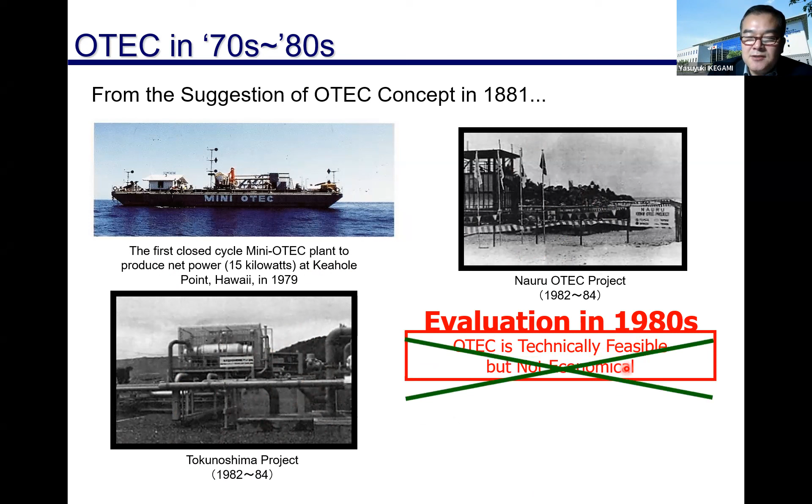As you know well, after the oil crisis, many OTEC projects started in Hawaii, Nauru and Tokunoshima in Japan. The evaluation in the 1980s was that OTEC is technically feasible, but not economical. But recently this evaluation has dramatically changed. Why? It's in the spotlight again due to technical improvement and changes in the social situation.

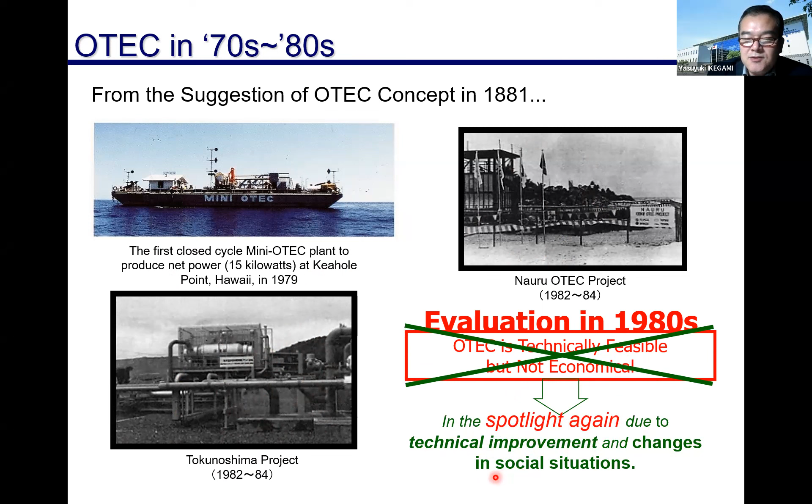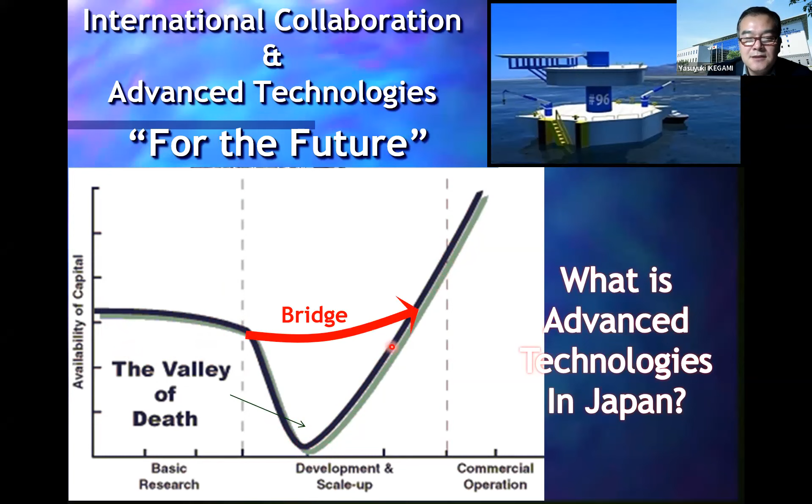Until now, the OTEC technology is a success, but it has not reached commercialization. But we developed new technology through our collaboration. So I think OTEC is in this position, waiting for the next step, commercialization. We already have the technology and the group. We want to accelerate this next stage, and I believe that from this meeting we move to commercialization.

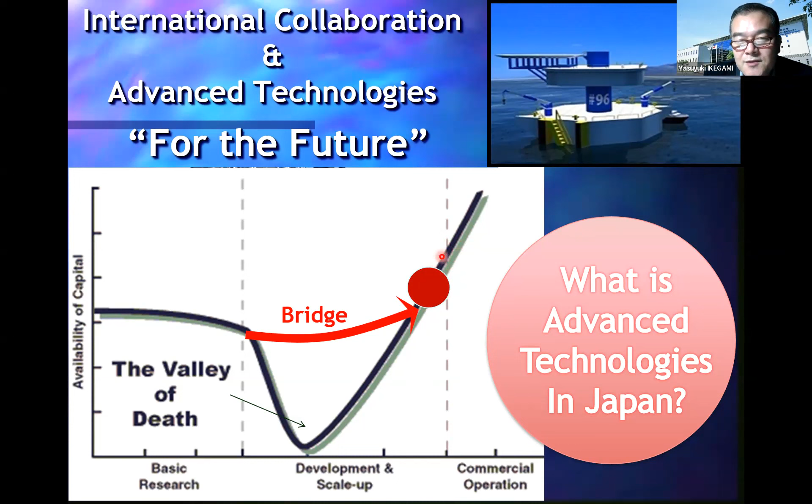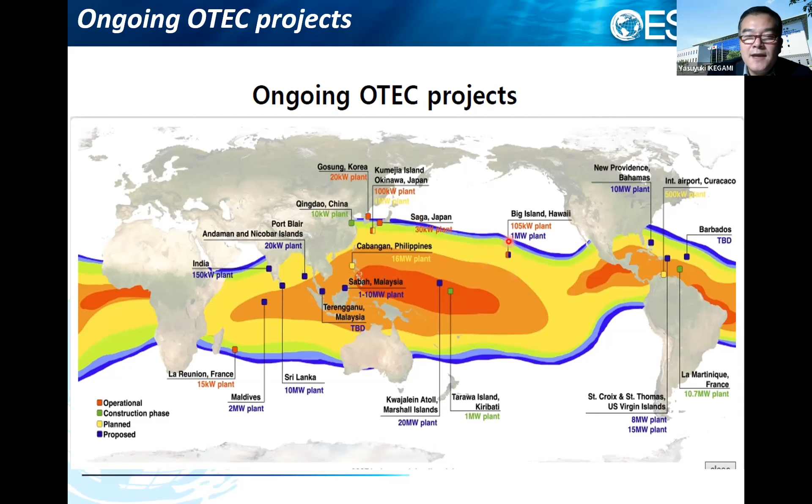Recently, as you know, there are many OTEC projects in the world. This map is from the IEA OES, the International Energy Agency Ocean Energy Systems, led by Dr. Kim. Ten years ago, only Japan and Hawaii, but recently many small island areas are promoting it. In Japan, the OTEC plant is a demonstration success, a world first. The 100 kilowatt plant is already connected to the Okinawa Electric Power Company, with post-OTEC deep sea water use, over 5 years of continuous operation using actual sea water.

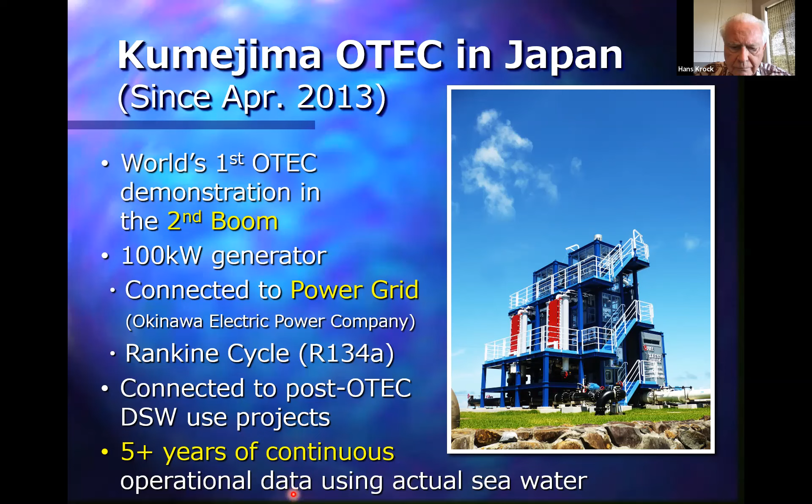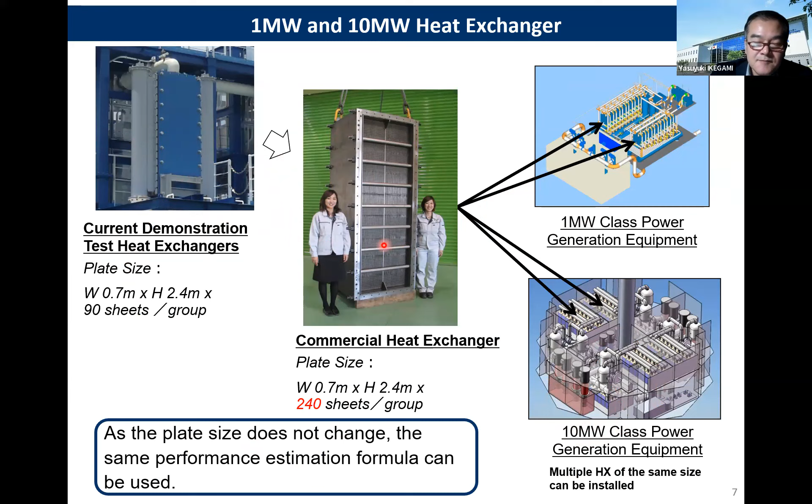These technologies use advanced heat exchangers and a new cycle system. We already designed 1 megawatt and 10 megawatt OTEC plants, and the plate size is already ready for commercialization. As the next step, we are planning a 1 megawatt OTEC. In Japan now, the government is promoting a 10 times larger deep sea water intake tube. We started last year, and by the end of this fiscal year we complete the pre-feasibility study. After the 10 times deep sea water intake, we are planning the 1 megawatt OTEC and deep sea water applications, with Japanese companies now promoting the 1 megawatt.

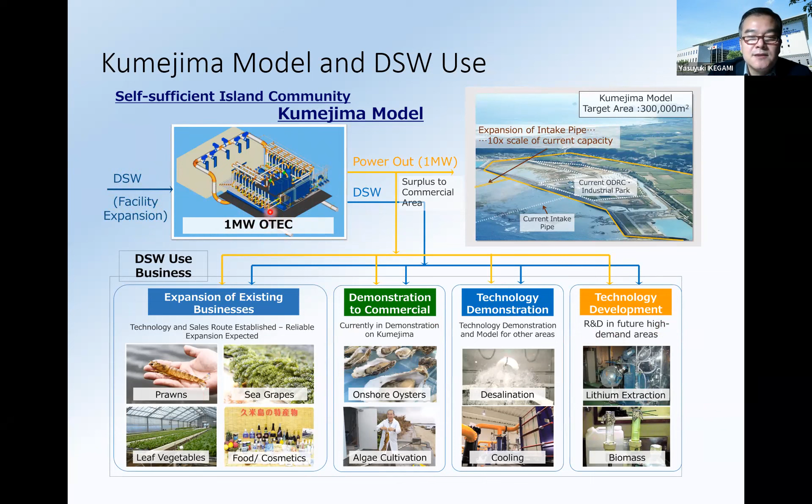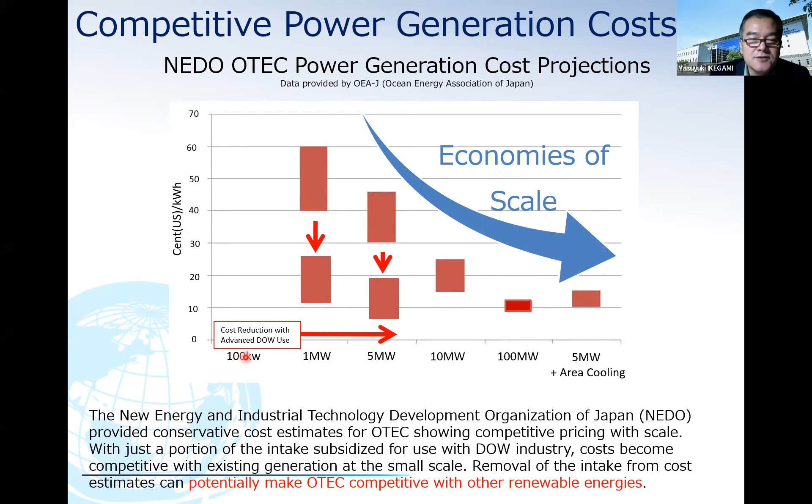OTEC has scale merit. Small OTEC is not economical, but large OTEC is very economical. This is one characteristic. And this is the cost estimate for OTEC only. But if we combine deep sea water applications, we can reduce the electricity cost with advanced deep sea water use.

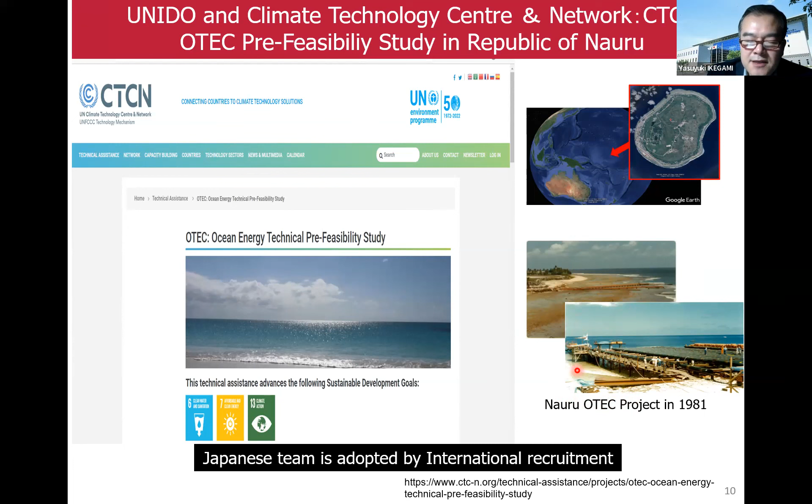Now we introduce the international collaboration projects. Recently, the UN and UNIDO are promoting OTEC projects. CTCN opened a tender for an OTEC pre-feasibility study in Nauru, and the Japan team was adopted. Nauru is a very small island, like Kumejima Island. 40 years ago, Nauru challenged OTEC, and now Nauru re-challenges OTEC. With only solar power, 100% renewable energy is difficult, so the Nauru government re-challenged OTEC, supported by the UN.

The Nauru project already finished the pre-feasibility study. The next step is the GCF, the Green Climate Fund, a very huge fund. Now we are preparing a medium project, 50 million to 250 million US dollars, for the Nauru OTEC project. The Nauru OTEC project is not only electricity, but also fresh water, food and deep sea water applications.

Another international project: MOL, Mitsui O.S.K. Lines, just started a Mauritius 1 megawatt OTEC project pre-feasibility study within 1 year. After completing the pre-feasibility study, the next step is implementation of the 1 megawatt OTEC, the desalination system and deep sea water use.

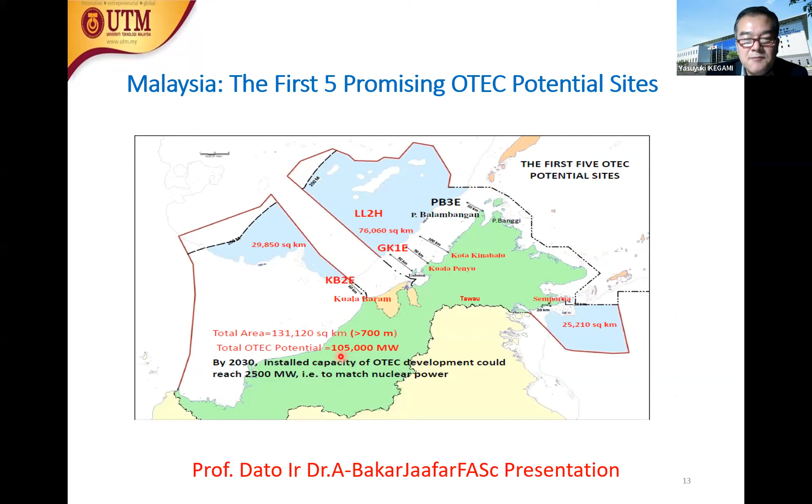Additionally, Malaysia has a very huge OTEC potential. 3 years ago, the Japanese government started a Malaysia project. Now we are promoting a new hybrid OTEC system, producing electricity and desalinated water. Desalination has already been realized in India, and OTEC already realized in Kumejima. As one system, we want to realize the H-OTEC system. The H-OTEC system is already completed in Japan, and within this fiscal year we move to Malaysia, constructing a Malaysia model like the Kumejima model, not only electricity.

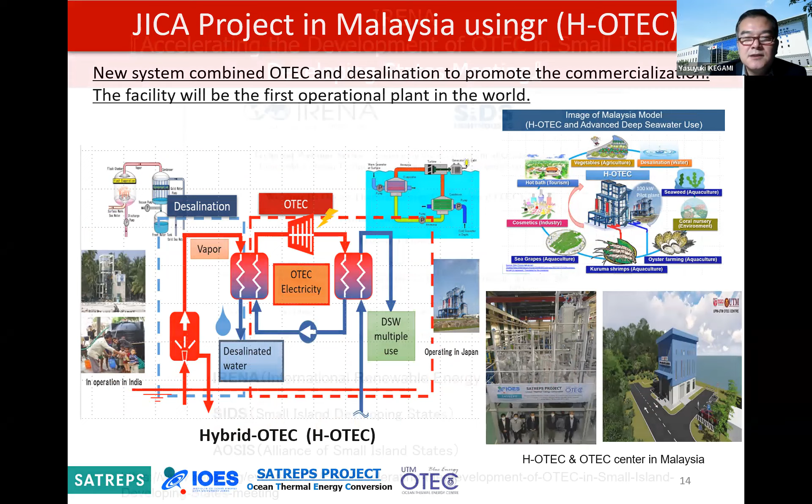Additionally, IRENA this year holds a meeting on accelerating development of OTEC in small island developing states. Small islands in the world are now strongly promoting OTEC. I'm introducing OTEC in the keynote lecture. Palau, the Bahamas, Mauritius, many small islands are very interested.

So as I introduced, now is the OTEC moment, so it's a very big chance to move to commercialization with international collaboration as Blue Innovation. Why not commercialize as a global leader in Hawaii? I've requested the Hawaii next movement.

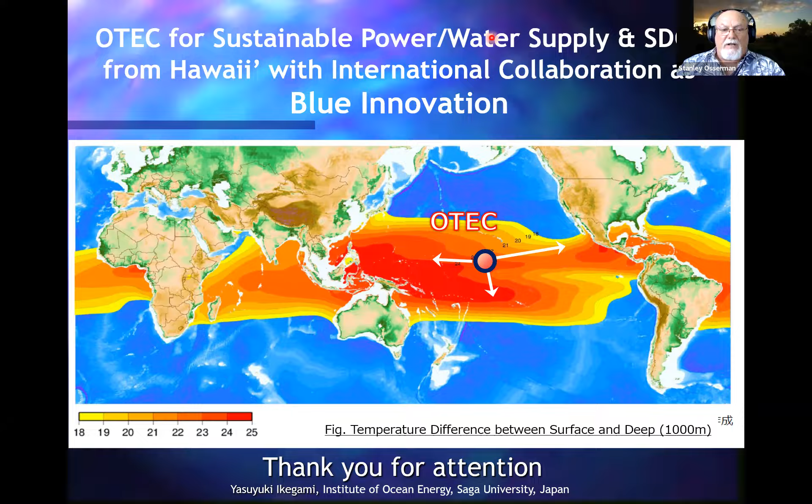Next, if Dr. Kim is ready, we'll put Dr. Kim up, and like I mentioned, I'd like to kind of hold Ben to the end, and we'll listen to Dr. Kim right now. So you may have to stop sharing your screen. There you go. Hey, Stan, I'm not sure that Kim is online though. Okay. I've been trying to contact him, but I haven't been able to. Okay. Well, in that case, Ben Martin, are you up to putting your slides up, and we'll put you in now then? Sure, I can go now. Okay. He has a real good presentation too. Well.

So hello everyone, my name is Benjamin Martin with Xenesys Inc., and we live in Okinawa. So the screen you see behind me, it's our mini Diamond Head. This is one of our beaches here on Kumejima, which is offshore of the Okinawa mainland. So I'll talk a little bit about what we're doing here on Kumejima, which is a small island about the population of Molokai, but much smaller as far as land area.

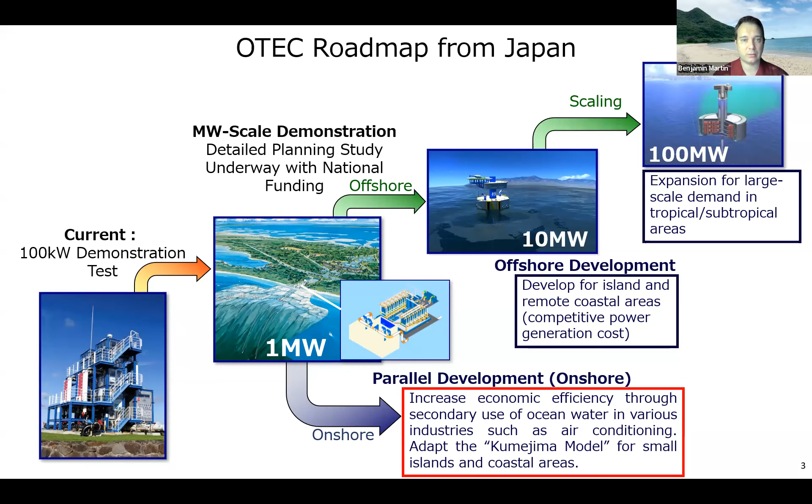So we see kind of two markets in the future, where offshore OTEC can help supply large islands and grids, and onshore OTEC can also support economies and island development and kind of the circular economy that people are looking for right now.

OTEC has the benefit of deep sea water, which is a local resource that provides energy security, water security, energy savings, food and economic security, and environmental security. It's hitting all of the issues that people are finding right now with the war going on, with the pandemic, and with the anti-globalization, from all the challenges we're facing in the world right now. So this is something that can enable islands to meet their local needs, but also have opportunities to trade and connect with their regional allies.

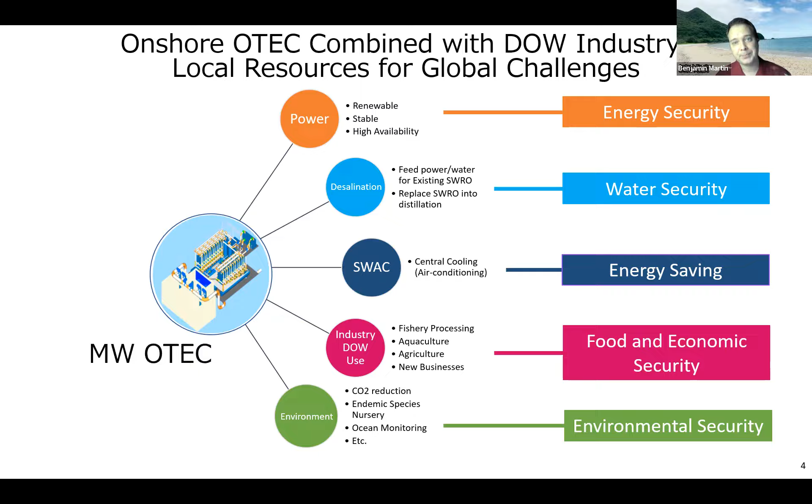So it's a challenge for us to increase more renewable energy. One thing we do have is deep sea water. Because we have a pipe that was installed in 2000, we can bring up 13,000 tons per day. That's about 1/10 of the size of the water available at NELHA.

But we use this water in a variety of ways, mostly for aquaculture. So we can produce prawns, we can produce sea plants, we can produce salt water and cosmetics. So these have become a very important use for us here on Kumejima. Around Japan, actually, there are 15 sites throughout Japan where you have access to deep sea water.

And so there's a whole variety of industries and uses that have grown up over the past 20, 30 years from Hawaii's initial demonstration. And so there's uses for the nutrients, there's uses for the cleanliness of deep sea waters, and there's use for the cold. And these can be used for everything from mineral extraction through power generation, which is something we're doing here on Kumejima.

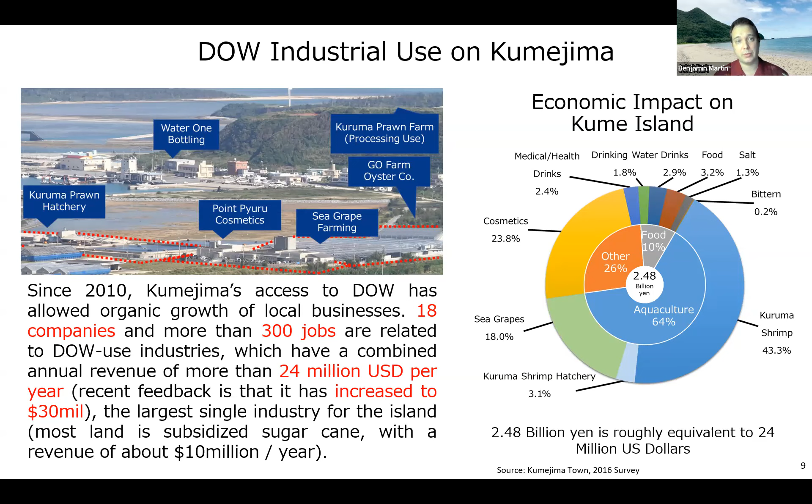So for us, it's a critical part of the local economy, but it's also something where there's potential for growth if we have more resources, which means new water. And so our perspective is we need more clean energy, we need more water. So we are working to integrate OTEC and these different industries right now at a small scale so that we can use the water multiple times and increase our benefits from the existing resource.

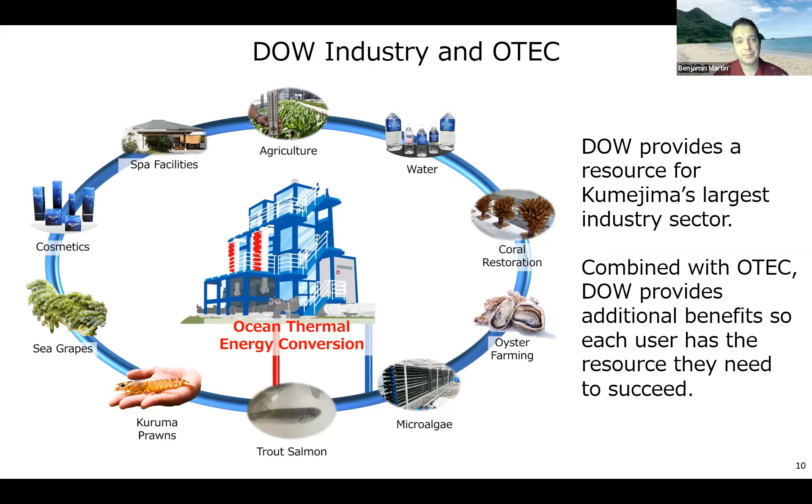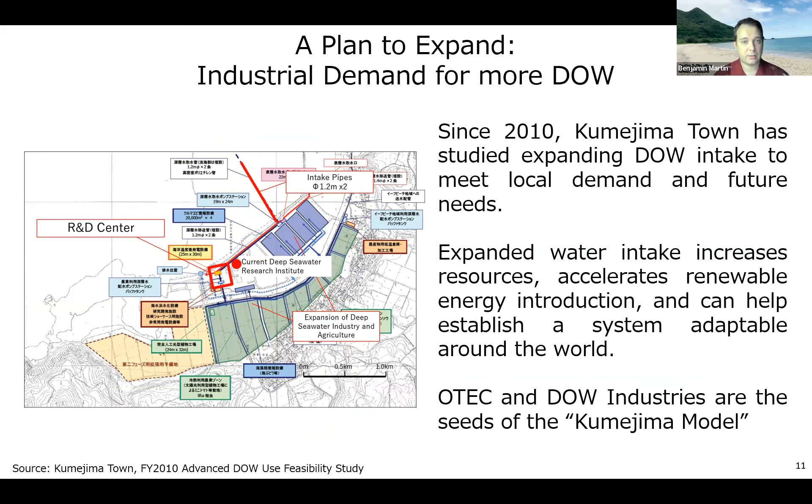However, there is demand to expand in more available areas. So since 2010, Kumejima has implemented studies towards expanding the intake, getting more water and increasing what we can do with the same amount of water we have. And then with that, also looking at our responsibilities towards the global environment and going green and creating renewable energy.

So Kumejima Town announced that they want to be 100% renewable energy back in 2008, and then 2018, and then in 2020 they did an energy vision, a policy looking at how do we get there. And so for their view, they want to do 1 megawatt onshore OTEC as a first step to get us about 20% of the renewable energy we need, and then a further 5 megawatts to get us to about 100% with renewable energy such as solar, storage and maybe EVs.

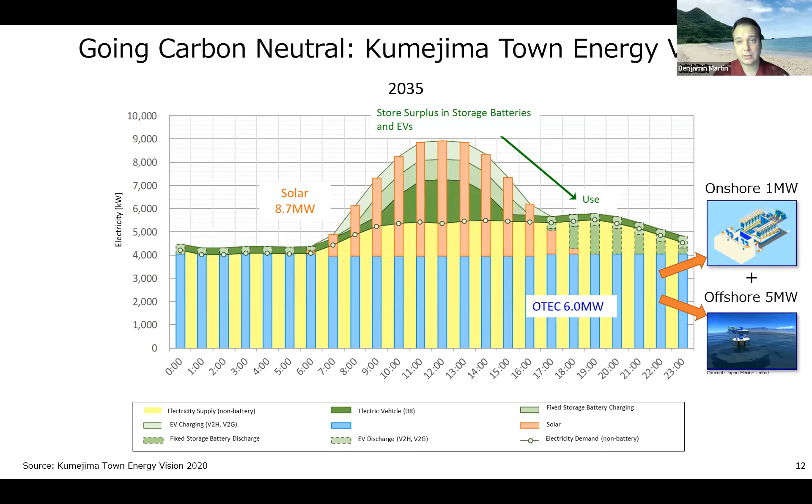And so that's their goal, is by about 2035 we can go 100% renewable energy through OTEC and solar and related technologies. And that's what we're working towards now on Kumejima. As Professor Ikegami showed, this is our estimate for OTEC growth and how the economies of scale will work on it. But we really see connecting the different industries we have right now can dramatically reduce the cost of onshore OTEC. So our perspective is using deep sea water as its own resource, its own industry.

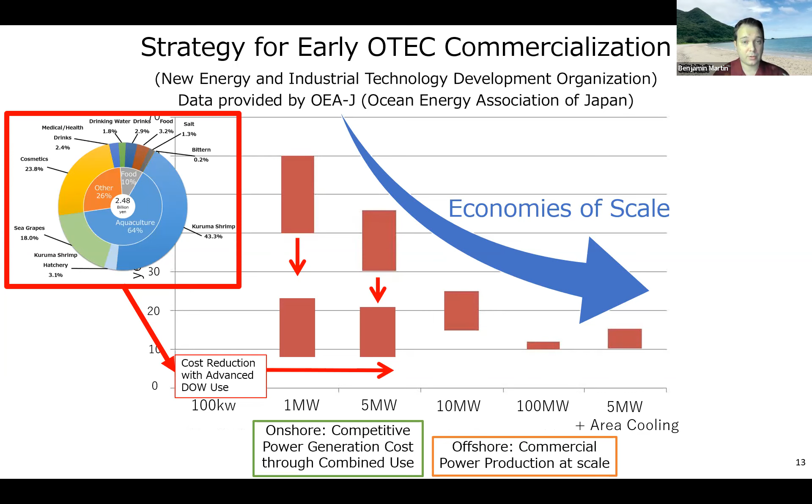Think about OTEC just on its own. If OTEC can use the water, produce power, it becomes a power generation business off on its own. And so that can be a really attractive power generation cost, even at the small scale, which is really a paradigm shift for small island countries where they're importing oil, they're importing diesel fuel, where now they can just create it all on their own and that money stays locally.

So for Hawaii, as many of you know, NELHA provides a great resource for Hawaii in terms of research and development, and they've really grown their aquaculture, and the amount of economic impact from NELHA is quite large for Hawaii as well. There was research done that shows that more than $100 million of revenue is added to Hawaii's economy from NELHA. And so while onshore OTEC is a little bit of a challenge there because of the different rules and things that are existing, there's a great opportunity likely for offshore OTEC in Hawaii.

And even at the 10 megawatt, the first offshore type scale that might be put in, we're looking at power generation cost of about 20 cents per kilowatt hour, which, while expensive, with Oahu right now with power generation costs of 32 cents or more, and I think we're looking at even higher costs more recently, it's attractive even at this early stage. But it also opens the opportunity for all these other uses, such as food production, agriculture, and all the things that are going on at NELHA, but also increasing scale or diversifying.

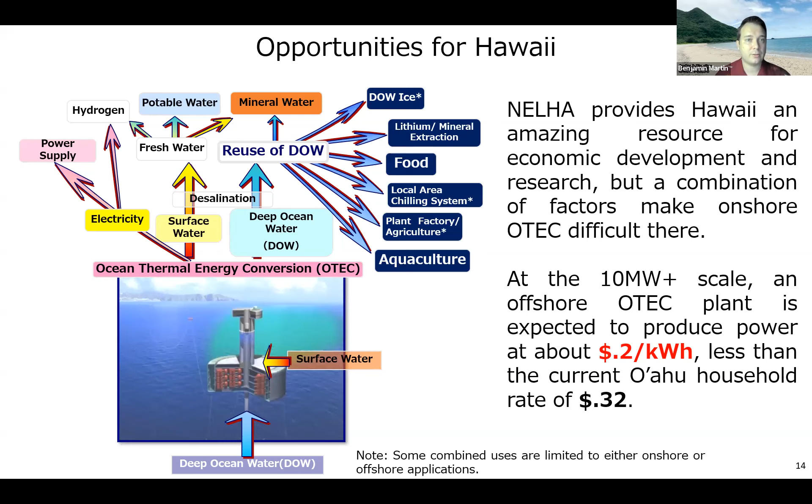So, connecting to around the world, OTEC from Hawaii's initial use in the 1980s, it's grown. And I think more than most of you realize is that there are now at least 38 sites with about 45 pipes around the world, including Korea, Taiwan, India, Japan, and NELHA, and also French Polynesia with new pipes that were just put in last year in French Polynesia to cool a hospital in an economically friendly, environmentally friendly way. So this is something that's growing and becoming ever more necessary, but we also need to more quickly bring forward the OTEC technologies that can help enable these and also expand our renewable energy portfolio.

So this is just a really quick introduction to what we're doing here on Kumejima and what we see going forward. But I'd be happy to answer questions, and I have a few more slides that I can bring up for those specific questions later.

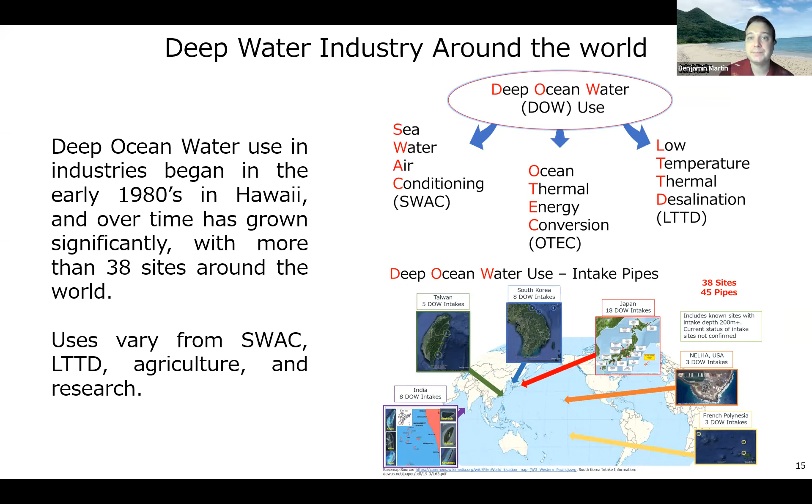So yeah, Ben, thank you very much for the presentation. I had a question from the chat, and it kind of leads me to the scalability piece here. The question was, at what point can we start producing hydrogen through electrolysis using OTEC? And I think they go hand in hand with the scalability issue. These projects require a large upfront investment, but it is a good investment because once you get it to scale, your return on investment is actually really good. But it's hard a lot of times to get initial investments because it is a large investment. Could you expand on that a little bit? And also, could you give us a really short version of the Rankine cycle, how does a water temperature give you electricity?

Sure. So for the electrolysis one, there hasn't been a major advancement in electrolysis technology that I'm aware of. So unless there's a major breakthrough in that, it'll be hard to bring down the cost, aside from going to scale or reducing the electricity cost and the water cost. So one way we can do that is scaling up, creating cheap OTEC power. Saga University has a flash desalination demonstration satellite here on Kumejima, and they do have a small scale hydrogen demonstrator. So the idea behind that is using post-OTEC water for cheap, low maintenance, clean water.

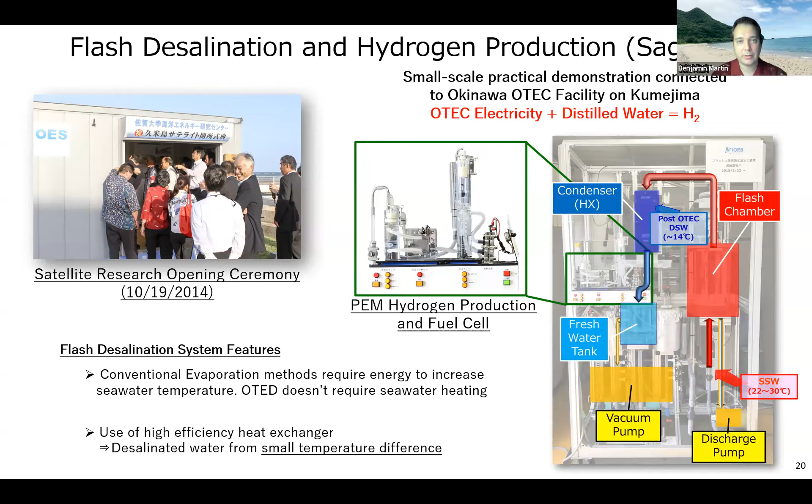And so that distilled water can then be used more easily because it is distilled. It wouldn't be as easy to drink, you'd have to add minerals back in, but it can go straight into a fuel cell and electrolyzer. But the general technology in electrolyzers hasn't really changed. So that's expensive and it requires electricity. But if the electricity is cheaper and the water is cheaper, that can be one thing that can bring this forward more quickly.

While you're pulling that slide up, working with hydrogen, the biggest cost is the electricity. So if you can get your electric costs down, like you say, to between 2 and 10 cents a kilowatt hour, now all of a sudden hydrogen becomes a very economical option. Sorry, what was the second question? Well, on the Rankine cycle, the actual process of producing electricity with OTEC.

I had a slide in my deck and I took it out. Let me grab one. Okay. I think some people are probably familiar with it, but I don't know that everybody is, and it'd be good to get a quick primer. Otherwise, we have to go to Dr. Krock and he'll give us the long version because he's a professor. He can't give a short version. He's going to give us all the long experts version. With the experts here today, I expected them to share, so I took my slide out.

But with OTEC, we're working with closed cycle OTEC. Dr. Vega will probably talk about open cycle, which has a very large diameter turbine because the pressure is low, so it can create very large scale facilities, especially onshore. In Japan we focus on small scale closed cycle because it's more compact. And so what we do is we have a low boiling point working fluid. Water boils at 100 degrees Celsius, and the surface seawater is only about 30 degrees Celsius. Sorry for those in the United States, I've forgotten how to switch to Fahrenheit.

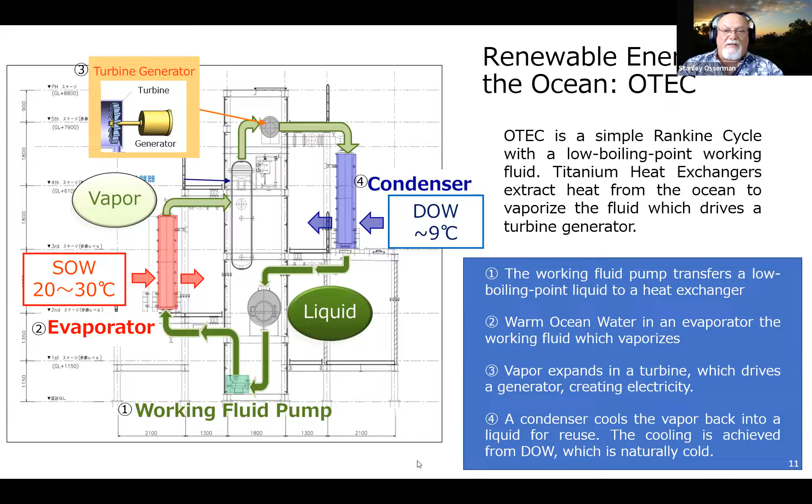And just to clarify then, when you're using the system, you're generating AC electricity with that spinning generator, correct? It depends on the power conditioners we connect, but you can do pretty much anything you need. But yeah, it's creating the AC, as opposed to solar panels and wind turbines. Well, solar panels specifically, they give you DC power. This gives you the option, right? You can do both. Terrific. Can use the DC for the electrolyzer and AC for putting it on the grid.

Were we able to get Dr. Kim up? I don't think so, but I do have his PDF version of his slides, and I could show them because at least the last few ones are really interesting. Okay. You want me to do that? Yes, Dr. Vega, can you combine yours and his, do both presentations? No, but let me first just try to find his. Wait. Okay. Oh no, his PDF. Oh, where are you? We'll look through the chat for any other questions. Okay. Oops.

Oh, there was a comment about my comment about the equator. You generally find a little bit more stable weather conditions right along the equator. So you get less high energy weather phenomena. Usually you have to have a big temperature differential to get that kind of weather, like typhoons and cyclones and hurricanes. You generally have more in the doldrums. You have less, I'd say, radical. You may have more rain, but you usually have less radical and powerful storms to damage your system. So if you have ocean-based OTEC, then you can have a more stable platform, and it lasts a lot longer.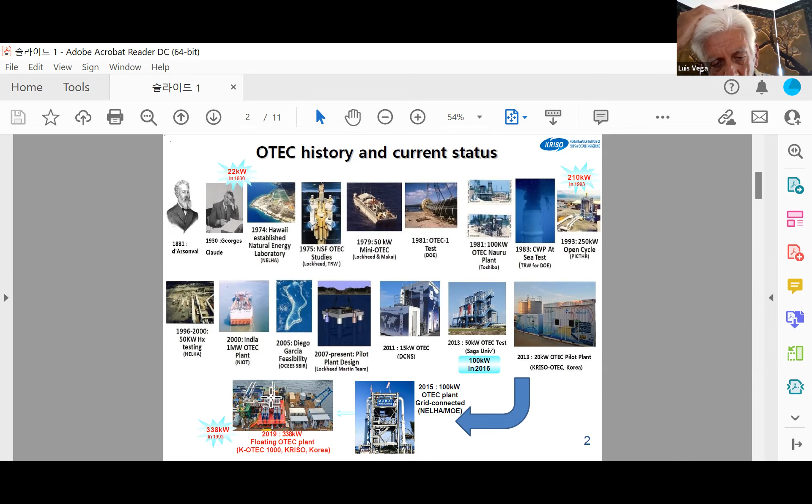But then, since the pandemic, unfortunately, because his budget was sitting in the bank for 2 years, the government took it back for other purposes, and now he's trying to get his money back to be able to deploy this plant in Kiribati. And then he likes to show this diagram that you've seen before, and I'm actually going to talk about it in detail during the next presentation.

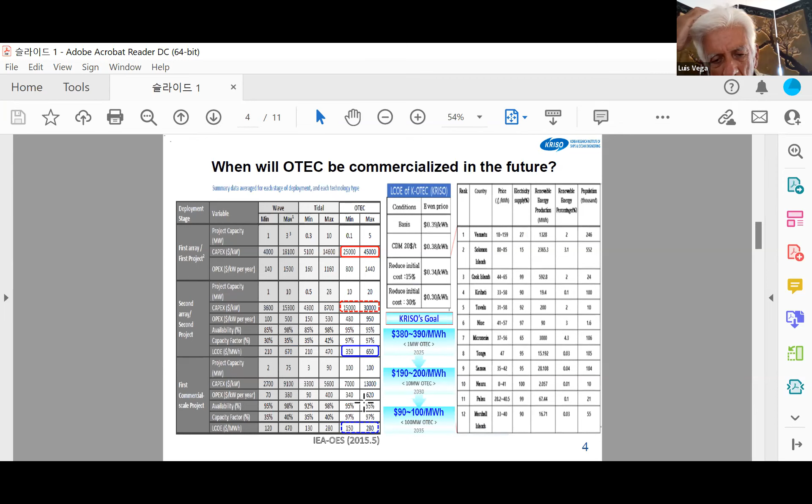And then here he shows a lot of data. It's hard to go through, but showing the different prices for the different systems, comparing wave to tidal to OTEC. And of course, OTEC comes ahead because it's 24/7, which tidal and wave are not. And then he likes to show the economy of scale, but I will talk about that later, so let me skip that.

And here he talks about how he would like to proceed. And fortunately for South Korea, like in the case of Japan, they do have industry involved and really providing a lot of support and advice to these developers, with government funding. But that's what he's trying to look into.

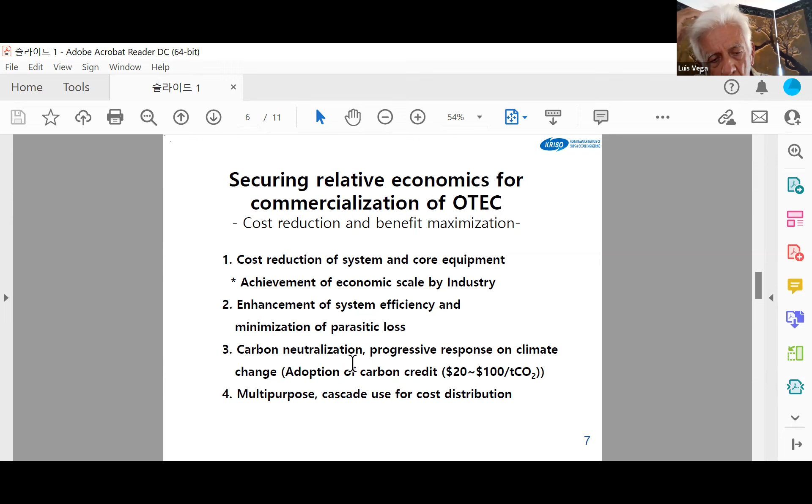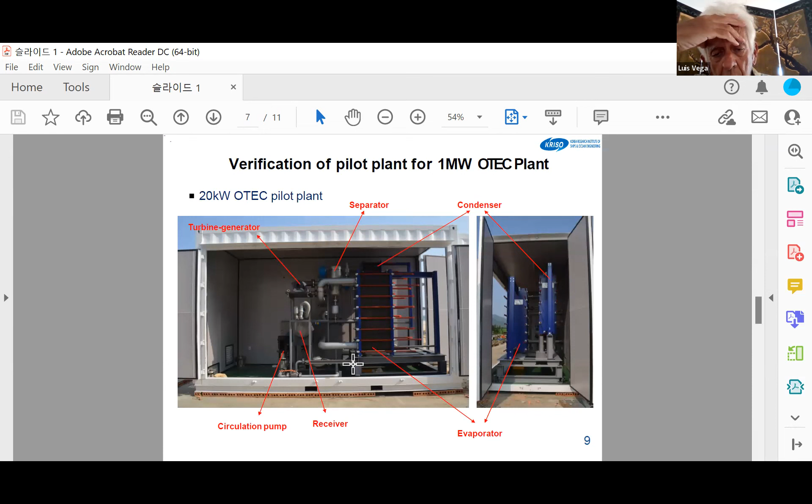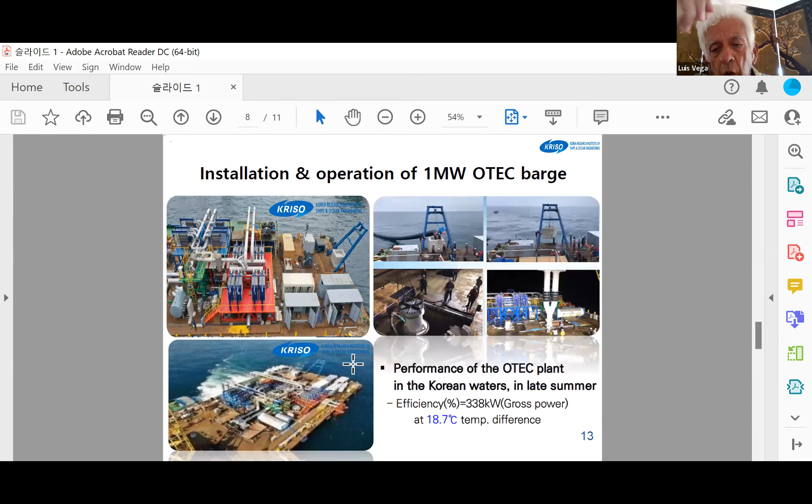And that just shows the small plant that he operated with his students, Dr. Kim in Korea. They did some wonderful experimentation and managed to select the right equipment for the next one, this 1 megawatt OTEC barge that they tested off the coastline there. Actually, I was there, and it was really successful. The beauty for them is that the bulk of the equipment is manufactured in South Korea. And this just shows the idea of how to move beyond these small plants for small islands.

And now the specific site in Kiribati and Tarawa. I hope that he gets his funding back from the government to install the 1 megawatt plant that will make a hell of a difference there. That's another idea they have, trying to move forward. And that was his presentation, although I did it in 5 seconds.

Do you want me to proceed now to what I would like to do? Let's talk a little bit about his presentation too, and this slide in particular. He told me that when he gets his funding back for Kiribati, it will actually be onshore versus floating, although it was designed for floating because he's going to be doing desalinization, and this slide shows the desalinization piece as well, correct? Yeah, but actually, just to correct that a little bit, it had to do with a budget gimmick, basically.

The plan was designed really to be land-based in Tarawa, but his government wanted to show that it works. So what he chose to do, smart man, he put the power block on a barge and used a vertical pipe, high-density polyethylene pipe that they once used at NELH, and he tested that off the coastline of South Korea. Then he took the barge back, and was going to tow the barge to Tarawa, beach it, and then install a pipeline that will go down to the right depth.

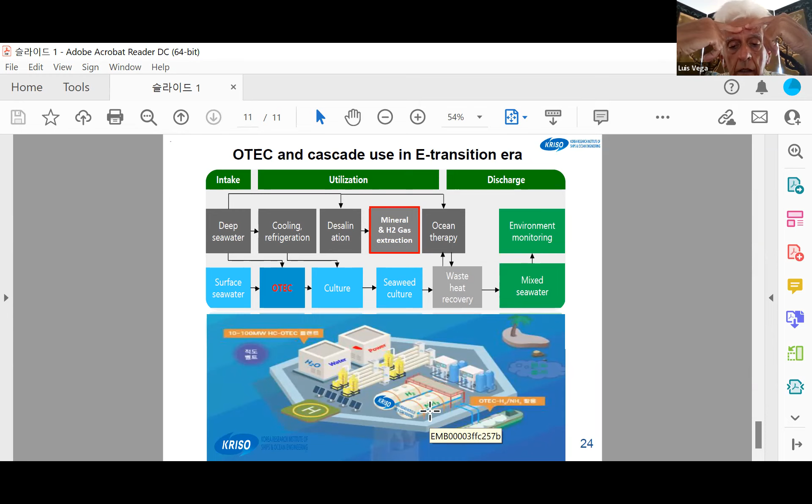Yeah, let me see if I do this right now. Can you actually see my screen? We still have Dr. Kim's view up now. Oh, sorry, you have to select your... your screen sharing is this. Let me just stop share and then start again, I guess. Yeah, that's the way to do it, huh? Now can you see it? It'll probably take a second or two to come up. You have it now? No. Did you select the image on your computer that you want to show? Yeah, I have it right now in front of me. And hit share again. Oh, but I have to go back to Zoom. Where are you, Zoom here? For some reason, I cannot go back to that. This is so embarrassing. Oh, share screen here. There you go. Too many windows.

But you cannot see my stuff, can you? It usually takes a couple seconds to come up, but we don't have it yet. How about now? Do you have it? No, this is embarrassing. I wanted to show his, but not mine. So if you select your screen, it should have what's on your desktop. You have to select your slides and then go to share again. Share screen, how about now? Oh, here we go. Okay, go ahead. There we go, it's coming now. Okay, you're up. Okay. You have the, oh, you have the first one. Right? We got it. Okay.

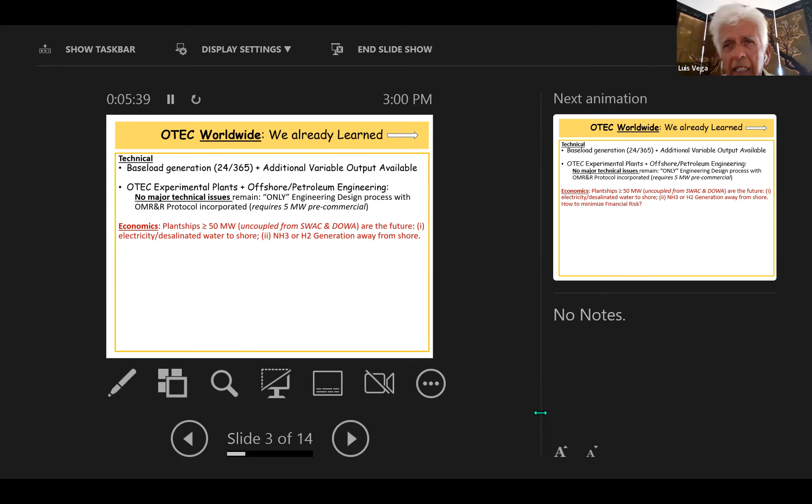So once more, the amount of water that I could use for a 2.5 megawatt OTEC plant - all of that water would be what I need to keep tourists in Waikiki happy. Then you see that it's uncoupled from the 100 megawatt plant with way too much water.

So when I think about future plant ships floating offshore, I really uncouple myself from seawater air conditioning and from deep ocean water aquaculture. Not to say that that's not valuable, but I'm looking into worldwide applications.

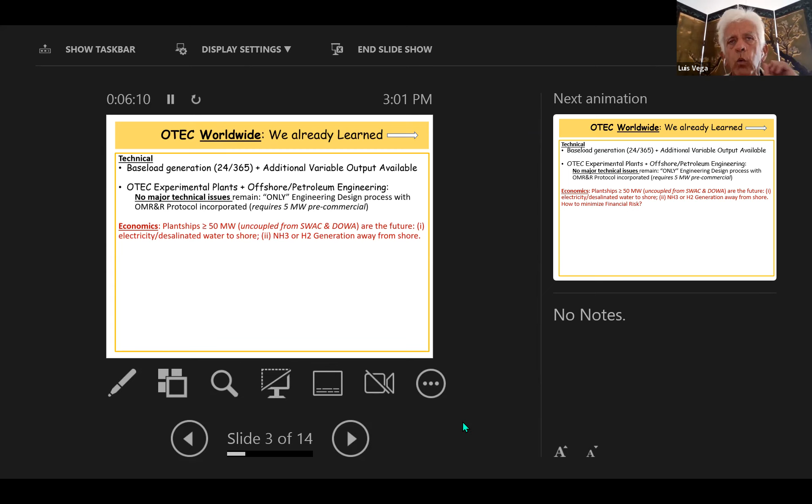And another question really is, how do you minimize the financial risks? Now, we don't have enough plants out there to be able to monitor what might happen, right?

But what we do have, thanks to Professor Nihous, and I'll talk about it in a second, we know theoretically how many plants we could install throughout the OTEC region. And we're talking about on the order of 5 terawatts of plants as a minimum that we could install.

And apparently, according to computer models, we wouldn't really be that detrimental to the environment, because we wouldn't change the distribution of temperatures in the ocean.

Now, just in case you're not an engineer, for the whole world, the primary energy we use is 18 terawatts. You know how much power, you know how much energy you have to multiply by the number of hours in the year. And in the case of OTEC, we're talking about 5 terawatts, for example.

But please keep in mind that primary energy includes the energy contained in a barrel of fuel, but as you know, only 30% of that is converted to electricity. So if the 18 terawatts includes fossil fuels, if you were to somehow make all the electricity without fossil fuel, we'd only be about 14, 15 terawatts, just to keep things in perspective.

Now, how about the political issue? I am convinced that we need government, angel, patient - and I call it pension - financing, because if you give me the funds to do this, me or whoever, there are many people qualified to do this, some are here right now on the screen, it would take me about 5 years to begin to produce electricity.

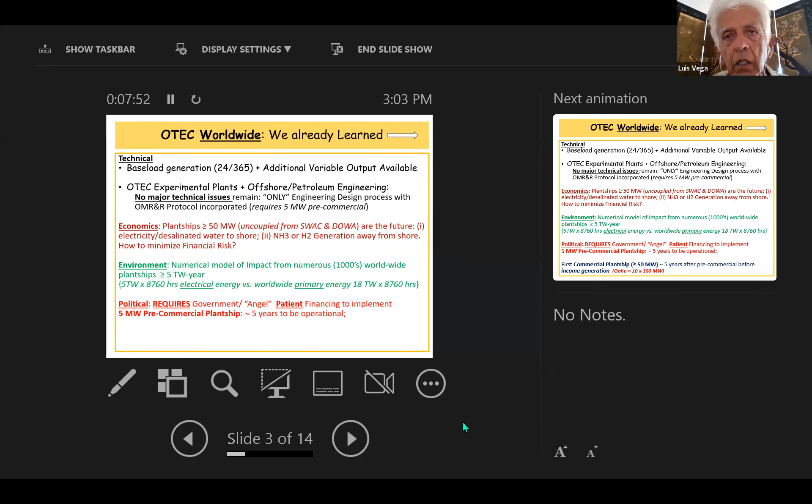And now I think that the first commercial plant ship that will be equal to 50 or higher megawatts will take 5 years to be operational after the pre-commercial plant. Just to keep things in perspective, Oahu is equivalent to 10 100-megawatt plants.

Now, this is one my dear colleague and friend for many years. Of course, he had to be French. Dr. Gerard Nihous, formerly from UH. We were kind of required by our Department of Energy to use this terminology. Theoretical resource refers to what is the source of energy. In this case, it is the temperature differential between 20 meters and 1,000 meters.

The technical resource is how many kilowatt hours you can produce. And then what they call the practical resource, not shown here, means where could you actually deploy this plant? Because, for example, I couldn't deploy one if there's an area that is protected for marine mammals. So I'm going to talk about the theoretical resource. And this is what Gerard did.

He took information from the World Ocean Atlas, and then he's showing you in there, coordinated to color, the annual average of the delta T. And just think that the redder it is, the better off you are. For example, one thing that is really amazing to me is that

We're here. Oh, can you see my arrow? Bummer, I cannot show you that. Why I cannot show the arrow? Your arrow shows up on the screen. Oh, let me get the laser pointer.

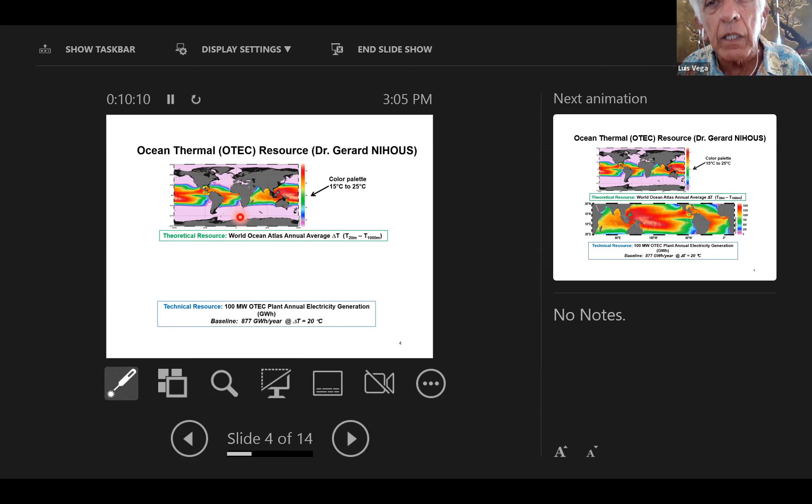And then if you move, I will say the rest later, okay? Let me go to the technical. So working together, we came out with a 100 megawatt plant, and then we deployed this plant. Gerard divided the world's OTEC resource into 25 kilometers by 25 kilometers squares, and right in the middle he put a 100 megawatt OTEC plant.

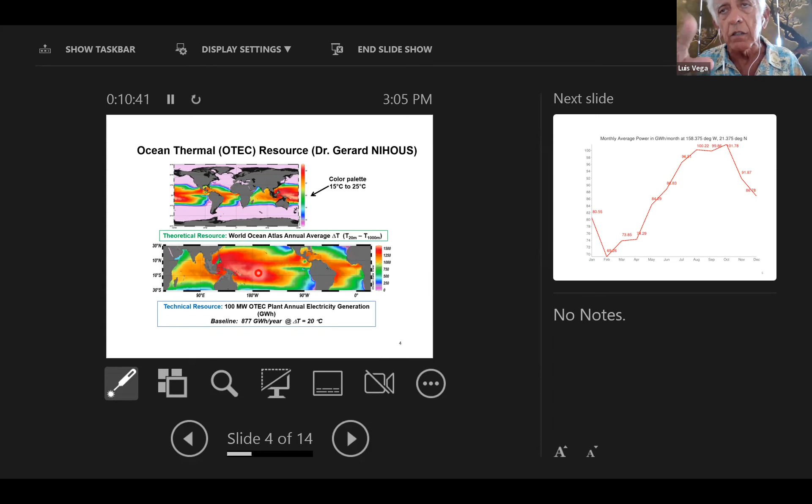100 megawatts is when you get a delta T of 20 degrees Celsius, okay? And I show you there how much energy, gigawatt hours, you produce per year, and how it varies throughout all the different regions. But now what I wanted to show you is this: 10 minutes ago, I went to Gerard's webpage and I looked roughly at an area that is right off Oahu.

That shows you the monthly average of the energy produced by this OTEC plant throughout the year. And I'm showing that because in February, for example, that'd be the lowest that I produce. So if I were the power company, I would say, okay, this number is baseload and the rest is intermittent as far as I'm concerned. So I might have to negotiate a two-tier contract.

One, they pay me for this amount at a certain rate, and they pay me a lower rate probably for the so-called fluctuating amount. So it has to be something like that. It's a new concept in a way. But what I wanted to do now for a while is the following.

When I talk here about the new perspective: when I first began to work in OTEC, I looked at the longest submarine power cable so I could tie my plant ship to land. And I came to between 10 and 20 kilometers. That was between Sicily and Italy, by Pirelli. So when I began to look into Hawaii, I tried to put plants around Hawaii between 10 to 20 kilometers.

But what has happened now, almost 40 years later, and this is what I'm trying to write here, and I'm trying to use my Naval Academy experience here. As you know, a degree of latitude has 60 minutes, and each minute is 1 nautical mile. Think about it that way, okay?

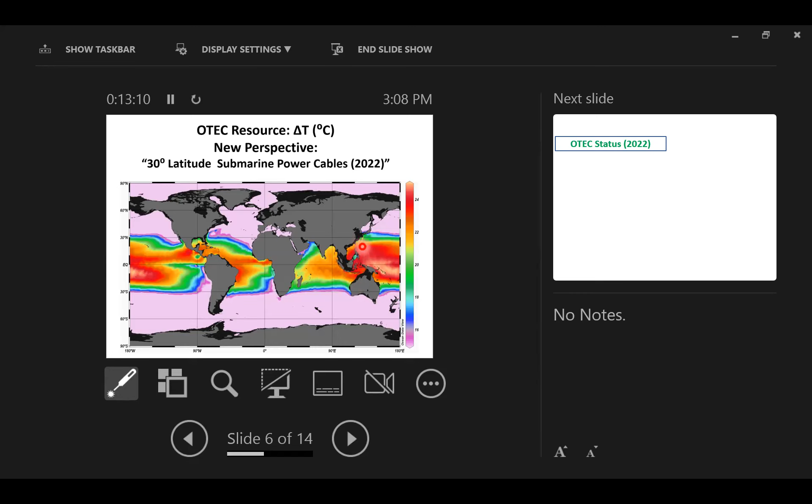And then after Indonesia, and Singapore. So all of a sudden, what hit me really hard is that, oh my Lord, look at that. Look at this huge resource. And now that I have these power cables, I can go 30 degrees. So this is 30 degrees, right? From here to there. Look at that distance. So I can go now from here to China.

So if China were to consider this, they could get the Politburo to approve OTEC, and the next thing you know, they will be deploying OTEC plants with these long distance submarine power cables that are now available and be able to support their needs. So that to me is really, really interesting.

In the case of ourselves, perhaps we can go all the way from Mexico or from the Gulf to the mainland. And keep in mind that we have, for example, a land cable that goes from the state of Washington all the way to Los Angeles. Brazil breaks the record. They have a cable that goes from the Amazon region all the way to the coastline, which is the longest one in the world right now. So things are happening that will allow us to deploy OTEC throughout the region and supply the electricity to all the places.

Now, where are we now? What is the status of 2022? The arrow is supposed to mean time there. Right now, we have a lot of technical, environmental, economic reports. We have some beautiful demonstrations of seawater air conditioning, deep ocean water aquaculture. You've seen those. We had experimental OTEC plants of less than 250 kilowatt or 0.25 megawatt.

And then Dr. Kim, who unfortunately is not here today, is going to deploy his 1 megawatt plant in Kiribati. So that's where we are at now. That is, we know that those systems work already. But how do we get to the future, right? So in the future, my hope, at least, is we have thousands of megawatt-sized OTEC plants worldwide.

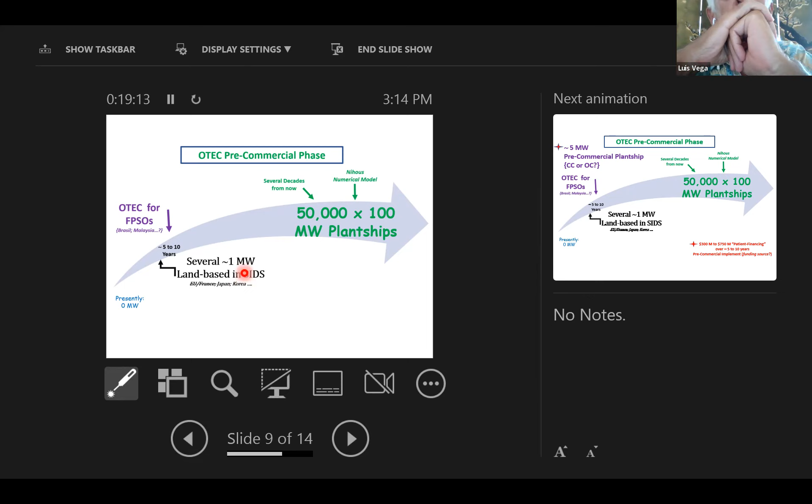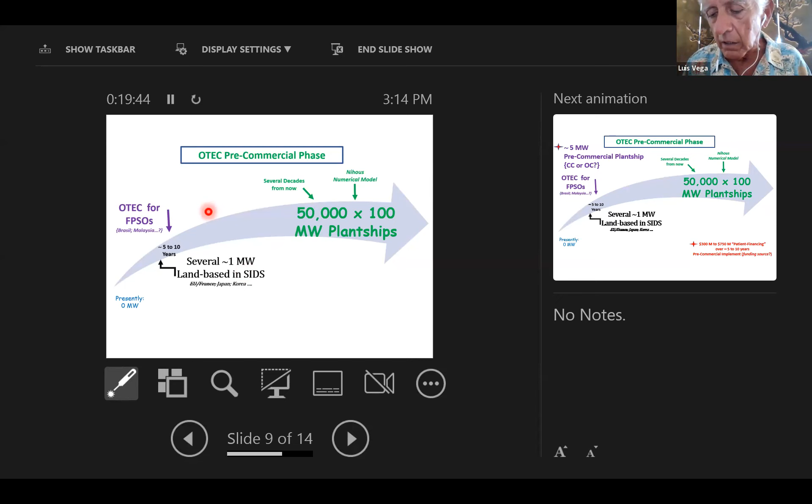Another idea that really worked beautifully is Brazil. In Brazil right now, they have a lot of petroleum in real deep waters, but they are not allowed to produce their own electricity. They need the electricity to run their compressors, for example, so I will install an OTEC plant ship close to the offshore platforms and I will run their FPSO. FPSO means floating production, storage and offloading. So they store the product to be shipped to land eventually, and we would also provide the electricity that they need. We were working on that, but the political situation wasn't really convenient in Brazil at the time.

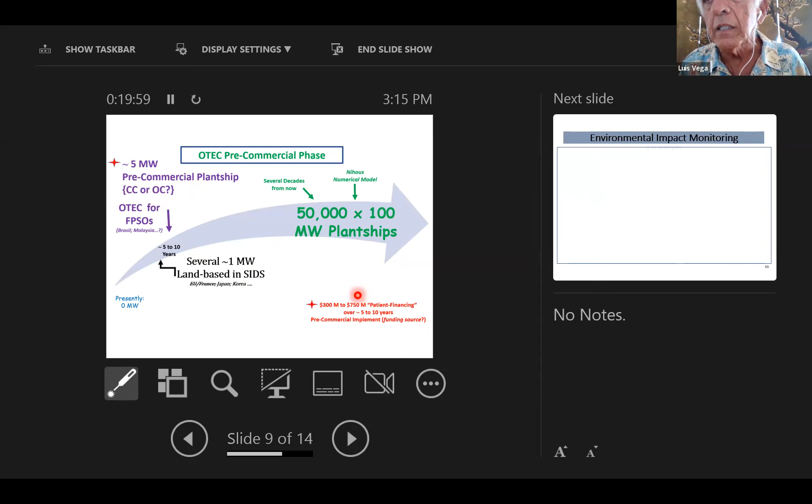So my dream, with the star there, is the 5 megawatt pre-commercial plant ship. I'm open to whether it would be closed cycle or open cycle. But the issue here, this footnote, is where do I get the money that we need to do it? That is the big challenge.

Now, one thing that's really important: when Lockheed Martin was working on an idea for the US Navy for an OTEC plant right off Oahu here, with some brilliant students at UH we worked on numerical models to find out whether or not the return water from OTEC would end up below the photic layer, because you need to be in the photic layer to really have the primary producers. The definition is about 1% of the surface light. When you get to that depth, you are below the photic layer, and it's about 120 meters roughly throughout Hawaii.

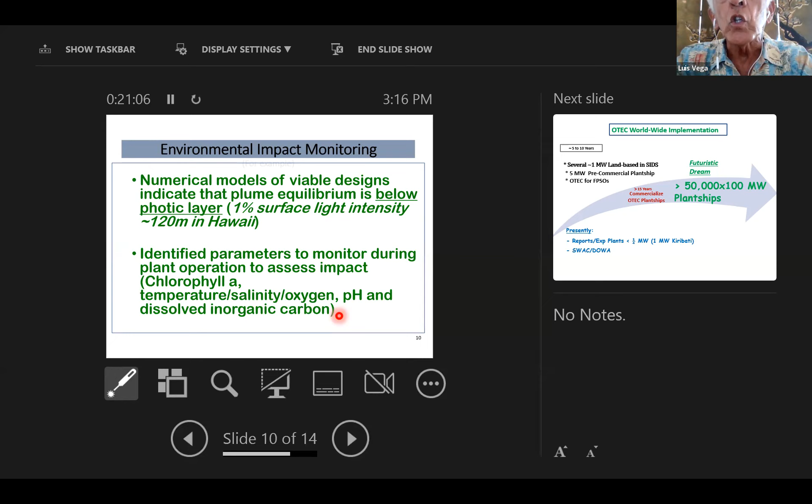Also important, because at one point, talking to the environmental permitting agency, they gave us a list of 4 pages of all the parameters that we needed to monitor. But what these bright students figured out is that by monitoring the parameters listed there, chlorophyll A, temperature, salinity, oxygen, pH, and dissolved inorganic carbon, you will be able to really monitor if the water has changed substantially. That was really important, I thought.

So going back to the future, one day I hope we will have at least 100 megawatt plant ships throughout. Now, one thing I would like to point out to you: this happens to be a design that I did with another company for a 50 megawatt closed cycle OTEC, okay?

And there I'm trying to show the cost of each major component, because OTEC is like a car, it has many components and you need to consider each one of those. So for example, the heat exchangers are a large cost, about 20% for a closed cycle plant, but the turbine generator is only like 7%.

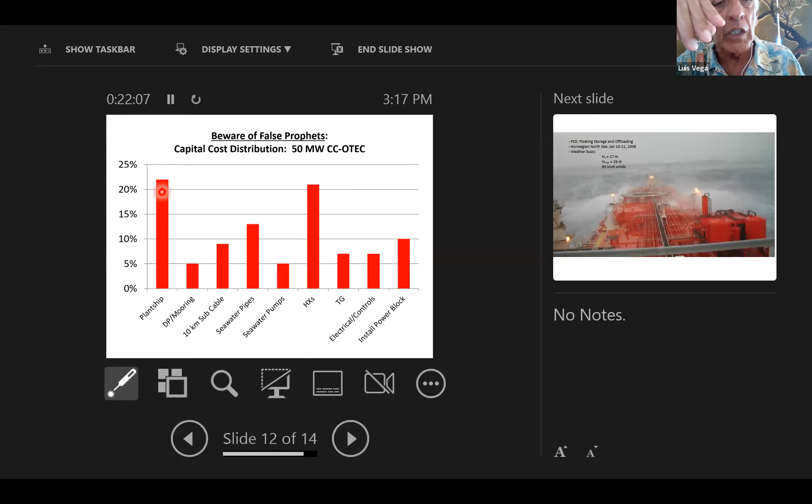In the case of open cycle, it would be the reverse, basically. The heat exchangers are really inexpensive, while the turbine generators will be that much more expensive. And then for the open cycle, we need more space, so the plant ship will be more expensive too. But we know those things.

And now some people ask me, how can our OTEC plant ship survive? And I show them, look at this. This vessel is actually smaller than the size of a vessel that we need for a 50 megawatt OTEC plant. Is it surviving a situation in the North Sea?

You can see the parameters, 17 meters significant wave height, up to almost 30 meters wave height, 95 knot winds. And this is not routine, but this happens to them every year and they survive. So naval architects and ocean engineers tell you this plant ship will survive. We don't have to worry about that.

And in closing, one thing that I would like to mention is that I know a lot of you are interested, and so am I, in the idea of producing hydrogen or anhydrous ammonia as a source of fuel. But please keep in mind, whether I use a battery that was charged with photovoltaics for my electric car, or a fuel cell to make electricity, just please remember that I need to make 4 units of electricity to go to the fuel cell system to produce 1 kilowatt. So I need 4 kilowatt hours to produce 1 kilowatt hour from the fuel cell.

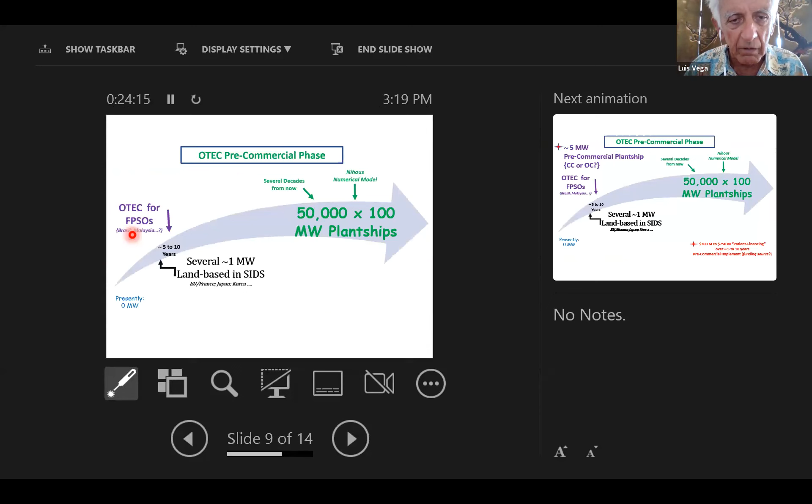So as far as I'm concerned, I only want to think about hydrogen production or NH3 production because I think about, can I go back? I forgot. Oh, this is the world that I envision. Okay, if you look in here, in the case of us here in Hawaii, I think that for land transportation, I will use electric cars, electric trucks. I have enough batteries to even run the inter-island shipping.

But for me to be able to connect to the world like we have to do, we import everything basically, I will need to have ships that cannot just run with batteries. They will have to use hydrogen. So the idea that I have with my dear friend CB Panchal, we're working on this right now, would be to have basically like filling stations. Let's say you go from Hawaii to the mainland, and along the line you will have to refuel your vessels that are using hydrogen to run their engines for propulsion. And the same if we go to Japan, for example.

So to me, when I hear someone telling me they want fuel cell cars for Oahu, I really go nutty because that makes no sense to me. Use batteries for your cars. Fuel cells, yes, for airplanes, and yes, for shipping to the mainland and to Asia. But we do not need fuel cells to run the cars. People tell me, yeah, but when I go uphill, the batteries get warm. So what? They get warm, but they still operate. So please, yes to hydrogen, but not for land transportation in Oahu. You don't need to do that.

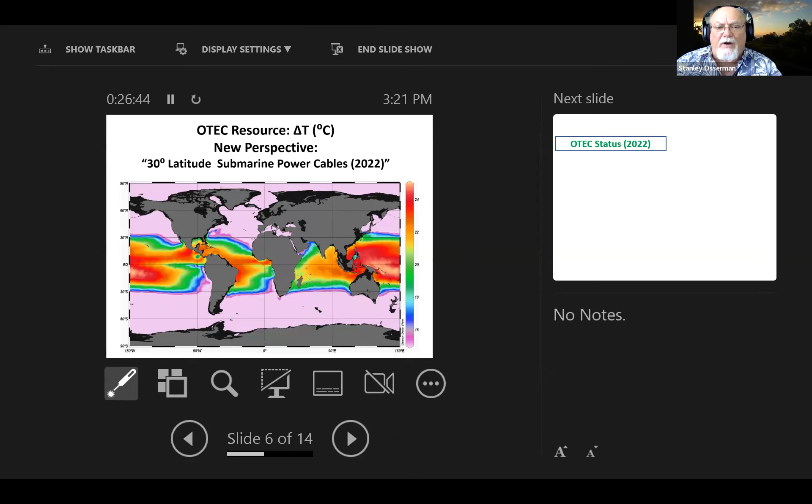I had one for Dr. Ikegami. When we initially talked to you, you had some thoughts on investments at NELHA. And you thought because of the volume of water that is already available at NELHA, that there may be other opportunities for NELHA to expand into more OTEC opportunities for Hawaii. If I could ask you to maybe expand on that, or maybe Ben can. I remember that coming up in some of our discussions.

Yes, thank you for your question. So I think there is already the deep sea water intake pipe implemented at NELHA, the world's largest intake pipe. If possible, we can demonstrate it below the 1 megawatt OTEC, but maybe the largest continuously operating OTEC plant. So with the success of the OTEC project at NELHA, promoting the commercialization from Hawaii to the world, I think is better. I hope so. Please, Ben-san, comment.

Great. So yeah, we have Makai Ocean Engineering, both the operator and others are here on this chat, so they may want to type in. But you know, the Makai Ocean Engineering platform facility has been there since 2011, testing heat exchangers. They've done amazing work, but a lot of their funding is also from U.S. government or agencies, and when funding changes, it becomes really difficult to continue developing. So they've been doing a lot of other great work as well.

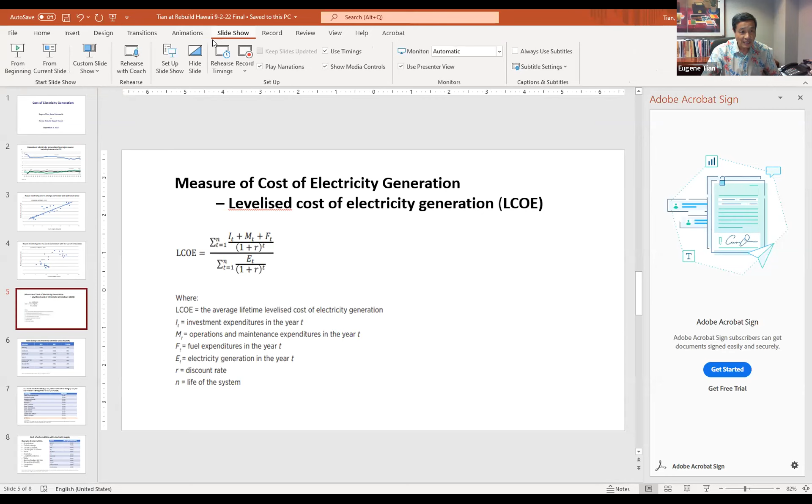You're good. Okay, so I got an assignment talking about the cost side of electricity. With that assignment I read a few pieces of literature, and I'll report to you what I found.

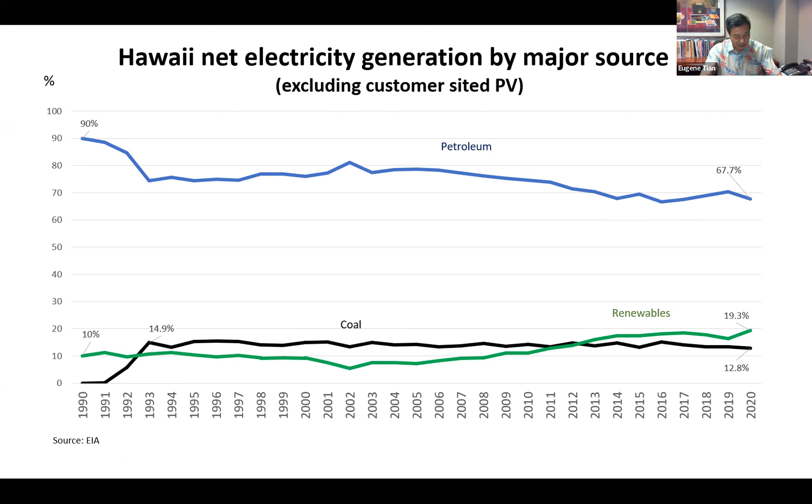So Hawaii's electricity generation, this is by source. You can see in 1990 we used 90% oil, down to 67.7%. The renewable share by 2020 is 19.3%. This is not including customer-sited rooftop PV. Actually, our renewable portfolio standard was about 30% in 2019 and increased to 40% in 2021, just in two years, increased by about 10 percentage points. So the goal is actually 40% by 2030, so we are ahead of schedule.

So look at this number - our electricity price is actually high, I think it's the highest in the nation. You can see it's approaching 35 cents per kilowatt hour. Why is it increasing? So I looked at the correlation between the petroleum price, mainly crude oil price - it's very highly correlated, the correlation coefficient is 0.9. 0.8 is considered significant, so 0.9 is very high. And looking at the percentage of renewables we use for utility scale, it's about 20%. So with the increase in renewables, it does increase electricity, but it's not significant - the coefficient is 0.67, which is below 0.8.

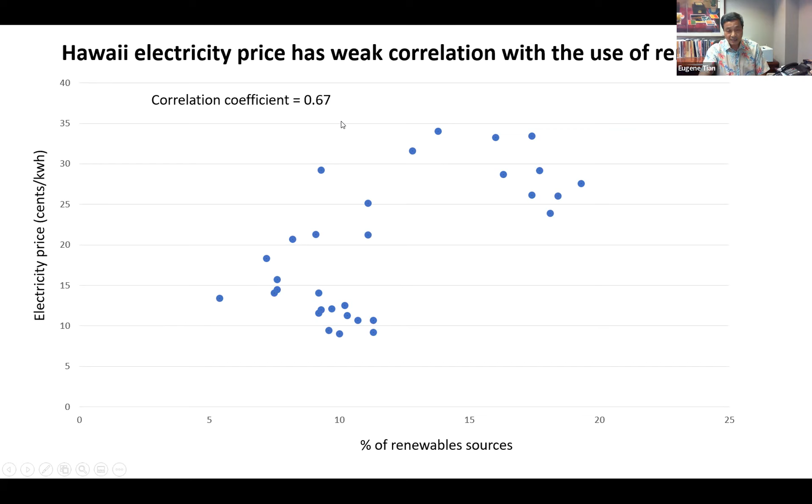I look at the measure most popular in the world. How do people measure the cost of electricity generation? The measure is called LCOE, levelized cost of electricity.

This includes the initial investment, the maintenance, the fuel use, how many years for the investment, and the total electricity generated over the lifetime. We can use this formula to compare different technologies, whether it's wind, thermal, or PV. Let me give you some numbers.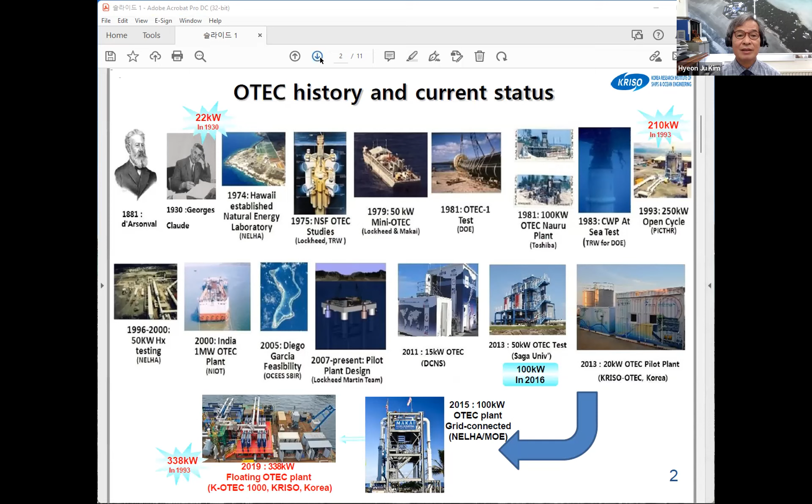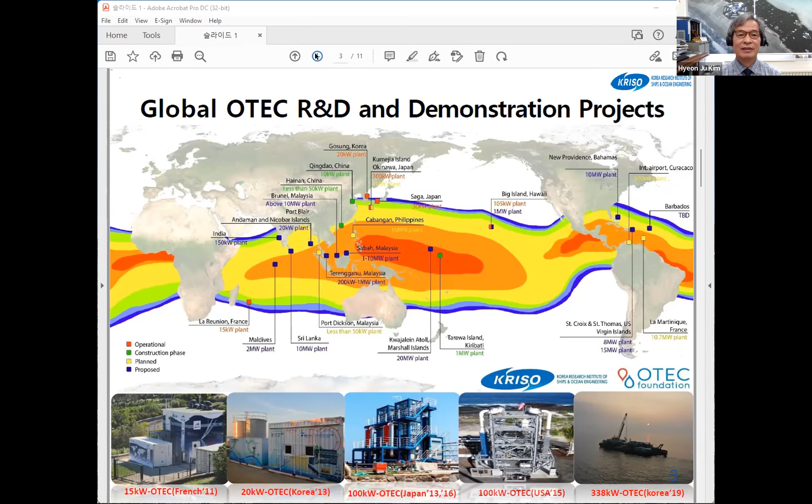How will these efforts make sure to commercialize OTEC plants in the near future? LCOE will be the most meaningful indicator from the viewpoint of the energy market. In 2015, IEA OES published the LCOE of marine renewable energies including wave, tidal current, and OTEC plants.

They range from 35 cents to 65 cents per kilowatt hour, and it will be acceptable to small island countries and developing states rather than developed countries. As you can see, the price of electricity in Pacific Island countries ranged from 40 to 160 cents per kilowatt hour, and the LCOE of K-OTEC 1000 was estimated at

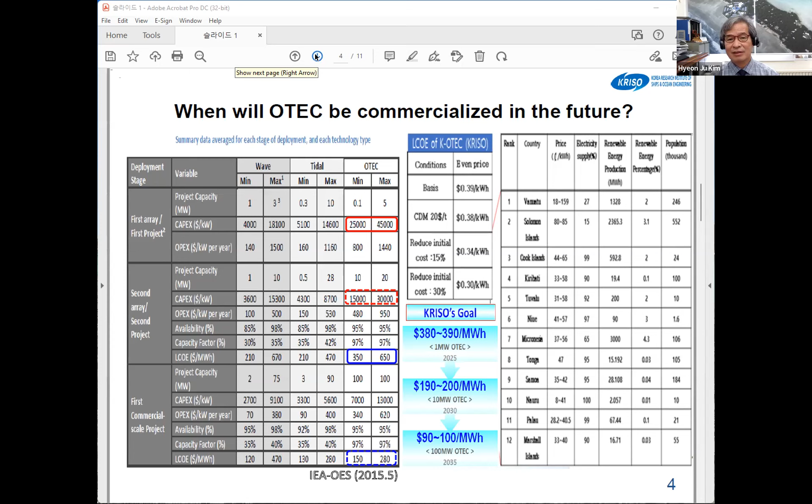Next slide, please. Okay, thank you. Can 15 cents per kilowatt hour of OTEC LCOE from a 100 megawatt power plant be accepted in the energy market?

For commercialization of an OTEC plant, the LCOE has to be competitive with other renewable energy at the objective region. The average PPA of PV plus ESS in the United States during 2018 to 2021 was only 3.2 cents per kilowatt hour, which is one third of the OTEC LCOE at the 100 megawatt scale. But the capex of PV plus ESS for continuous electric power supply will be 6 to 10 times the cost in remote islands or off-grid systems.

This shows the target cost reduction curve and LCOE estimates of wave and current energy by IRENA, and we, the Korean OTEC team, have overlaid OTEC expectations onto it. As you can see, when 2 gigawatts of marine energy facility capacity is distributed, LCOE will be lowered to 10 cents per kilowatt hour, and OTEC can also be expected to do so. Next, please.

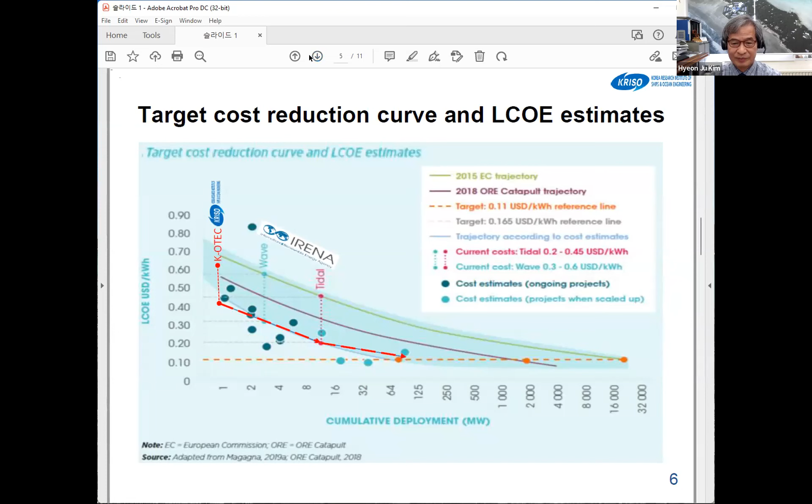To secure relative economics for commercialization of OTEC plant, we have to do our best to reduce cost and to maximize benefit as below. Cost reduction of system and core equipment have to be studied. It will be achieved by industry sectors, by scale of economy.

And enhancement of system efficiency and minimization of parasitic loss are tried. And carbon neutralization, progressive response on climate change should be included. Then we can apply carbon credit of $20 to $100 per 1 ton of carbon dioxide for LCOE estimation. And finally, multi-purpose use of OTEC and DOWA for cost distribution and cost sharing can be expected. Next, please.

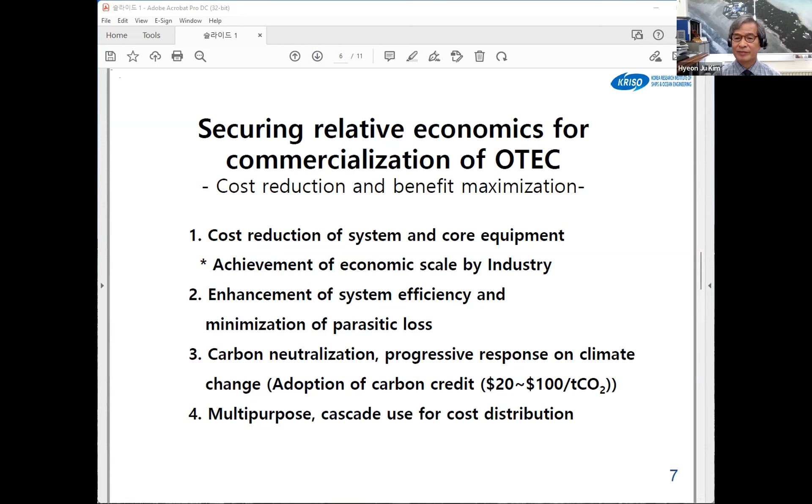Now, let me talk about R&D status and future plan of the Korean OTEC program. In order to develop megawatt OTEC plants, we carried out basic study with a small pilot plant and studied a lot for performance enhancement. By analyzing and designing with a large OTEC cycle, this 20 kilowatt OTEC pilot plant was manufactured on simple Rankine cycle in 2013. After this, all key components such as turbine generator, separator, condenser, evaporator and so on have been designed and developed by the Korean OTEC team. Next, please.

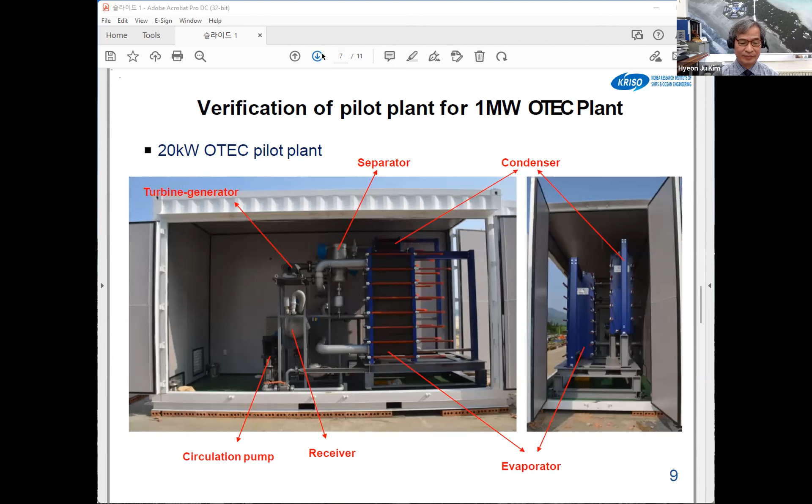We have manufactured the key components of turbine generator, condenser, evaporator, and so on for 1 megawatt OTEC plant since 2016. You can see the key components mounted on this OTEC barge: intake pipe, drain pipe, evaporator and condenser, and turbine generator in green on the skid and so on.

And finally, we assembled all key components of a 1 megawatt OTEC plant on the OTEC barge in August 2019, before the International OTEC Symposium in 2019 held in Busan. It was towed to Pohang offshore for installation of a mooring system, and the riser system was installed through the moonpool of this OTEC barge between two approaching typhoons. From this field test, output of the OTEC plant was recorded at 338 kilowatt in gross power. At that time, the temperature difference between surface and deep waters was 18.7 degrees Celsius. Next, please.

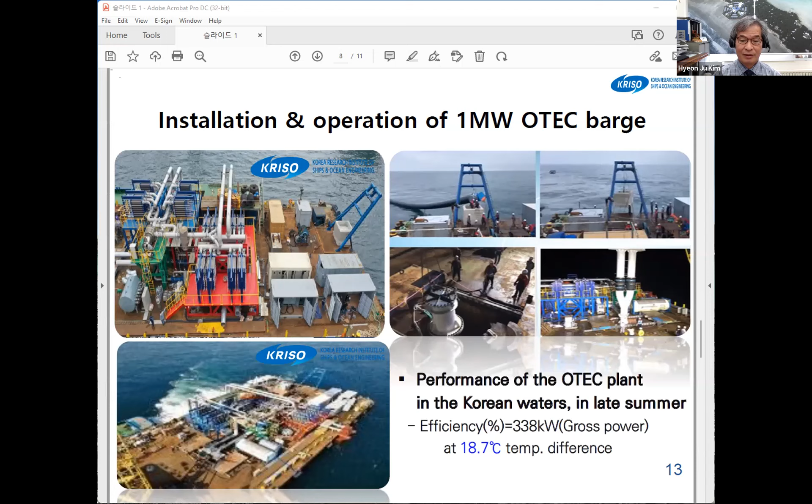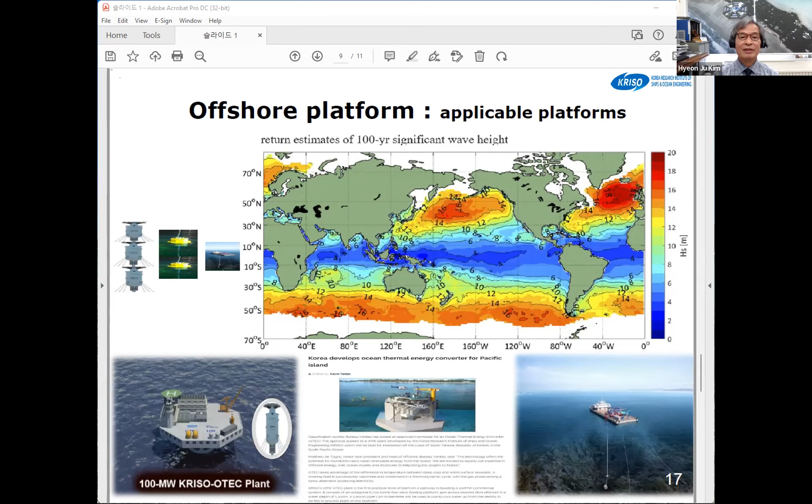Thank you. When COVID-19 is ended, we hope to transport and install this 1 megawatt OTEC plant at Tarawa Beach as on-land type, and establish a K-SDGs model in Kiribati using the OTEC plant in the future. For that, we established the SSUA program, named Sustainable Seawater Utilization Academy, in 2016, and run this program to strengthen regional capacity for OTEC application and downstream utilization for energy, water, and food. During 2018 to 2020, many volunteers from Fiji and Hawaii, as well as Korea, participated in these activities of the SSUA program. Next, please.

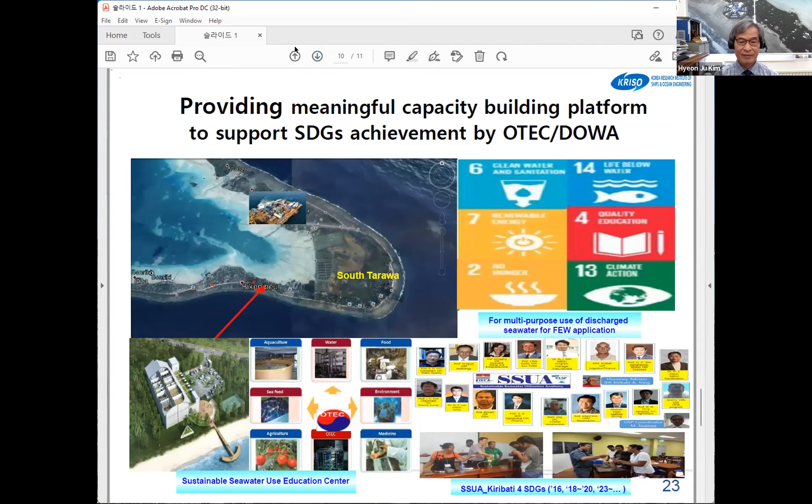This program includes OTEC and cascade use for hydrogen economy, as well as SDGs support for small island developing states. Recently, we carried out a feasibility study of OTEC H2, and we are discussing it with the industry to adopt advanced electrolysis systems. This is one of our future plans to produce hydrogen and ammonia by OTEC power and desalinated freshwater for the hydrogen era for carbon-free islands.

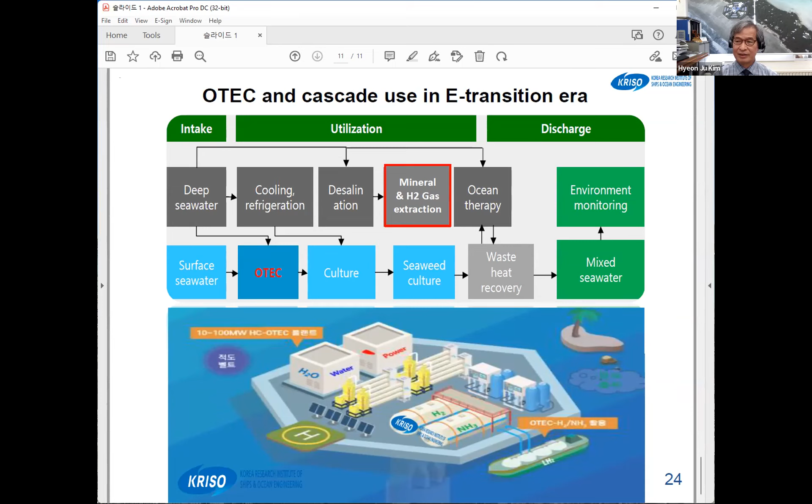Okay, let me wrap up my presentation today. I wish this humble introduction could give you some insight for Renew and Rebuild Hawaii. Thank you. Thanks a lot for your attention.

Dr. Kim, thank you very much. I'm sorry it took so much effort to try and get you in here. We probably should work on that to make it easier for our guests in the future, but thank you for your patience and thank you for your presentation. Thank you for your support.